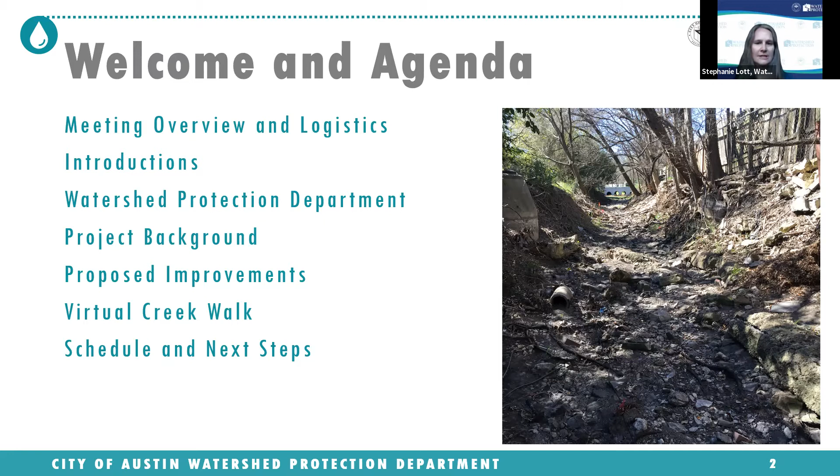We have Clayton West here. He is an engineer with the Watershed Protection Department, and he's going to give the background information. We also have Javi Gonzalez. He is with the Public Works Department, and he is managing the project for us. Our consulting engineers on this project are Freese and Nichols, and Jay Scanlon and George Fowler are the engineers working on it, and they are going to walk you through the problems and the solutions. So with that, I'm going to turn it over to you, Clayton.

Thanks, Stephanie. Hi everyone, hope you're having a good evening. As Stephanie introduced me, I'm Clayton West, an engineer with the Watershed Protection Department. I've worked in this group for about 7 years. Within the department, our group primarily focuses on repairing and restoring streams that have been damaged by erosion.

I want to give a quick background on our overall department, because a lot of times folks aren't too familiar with it, and maybe confuse it with the Austin Water Department. We are the Watershed Protection Department, and our mission is to protect the lives, the property, and the environment of Austin, primarily by reducing the impacts of major flooding, erosion in the streams and rivers through Austin, and water quality pollution in the streams and rivers of Austin.

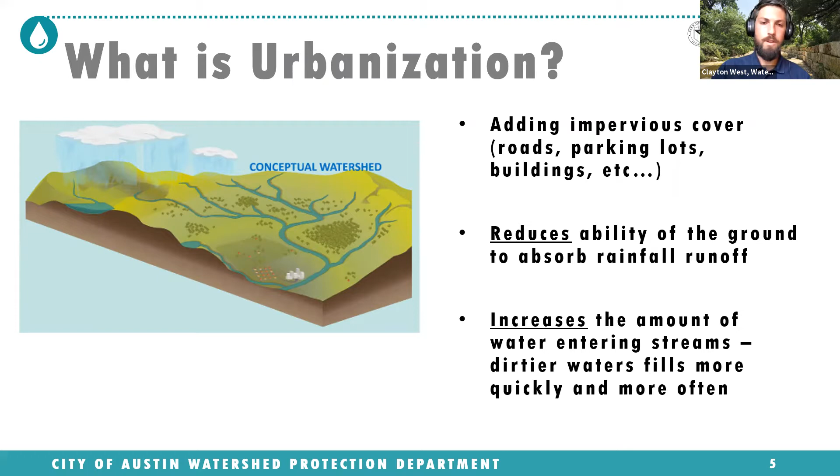I have a little cartoon that illustrates this. It's a bit simplistic, but hopefully it gets the message across. On the left-hand side, you can see a cartoon of what would be a rural landscape, with some nice green meadows and a stream, in a cross section view. When it rains, about half of that is going to be infiltrated, meaning it's absorbed into the ground, and maybe becomes groundwater, maybe percolating out into a stream further down.

40% is going to end up falling on the ground then evaporating back into the air, and only 10% is going to run off, flowing over the land into a stream or river. Now contrast that to the right-hand side cartoon, which shows an urban environment, more like where there's been that development I was just talking about. In this case, you get less rainfall infiltrating, only about 32%. You get less rainfall evaporating, and a lot more becomes runoff. Basically, the ground is less absorbent and more runs off. So between these two, I think it's obvious that Austin is more of an urban environment.

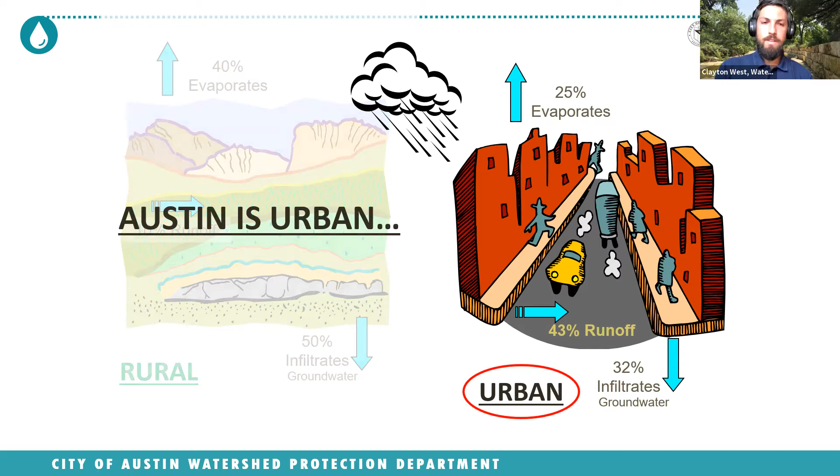And I think we're all familiar with this because when it rains a lot in Central Texas, we know that it floods. This is a picture of House Park on Lamar, if you're familiar with that area of town. In 2015 or 2016, I forget which year exactly, we had those big rains, and Shoal Creek, which runs right along Lamar, flooded.

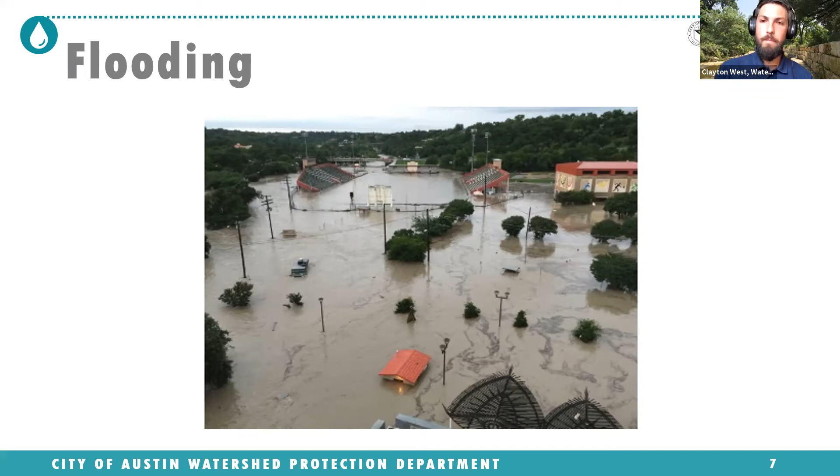This flooding probably would have occurred to some extent had there not been development. But the fact that the Shoal Creek watershed, the whole area of land that drains to Shoal Creek, is quite developed, being one of the older parts of Austin, means this flooding was surely made a lot worse by that development. The erosion, that faster moving water, enters the channel more quickly and has more energy, so it can wash away and transport more of the material around that channel.

So these two photos actually are from the channel that we're talking about tonight. We call it Williamson Creek Tributary 4, which means it's a tributary of a smaller stream that drains eventually to the larger stream, Williamson Creek. But I've kind of nicknamed it Turtle Creek because that sounds nicer, and the road runs through there in y'all's neighborhood, Turtle Creek. So these are photos of Turtle Creek.

Can I ask a quick question? Sure. Was part of the reason y'all are doing this because of the big apartment complex that's being built at South First and Turtle Creek? No, because that thing's a monster, and there used to be a lot of ground cover. There's a big field and stuff there, and now that's gone. So I was just wondering if this was kind of why y'all decided to take care of this problem now, or before it got bad.

That's a good question. Actually, there's not a lot of relation to that apartment complex going in. This stream, as a department, our group has been monitoring it for a number of years. And the way we decide to prioritize our projects is based on how severe the erosion is, et cetera. This creek has been on our short list for a while, and that development is new, and I'm sure they're complying with all the appropriate regulations.

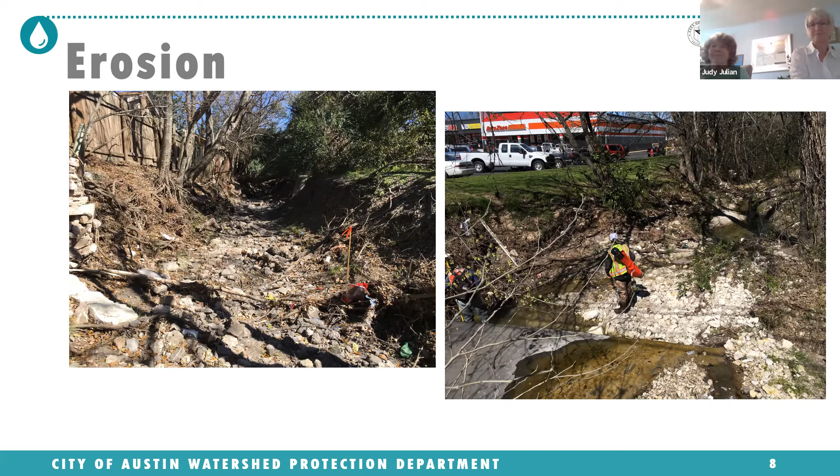Thanks, Judy. All right, just the last slide I have, giving an example of the problems our department's mission is to address: water pollution. Water pollution decreases the quality of the water in our streams. It degrades habitat for wildlife, fish, bugs, and other things that naturally want to be in the riparian or stream corridor. In Austin, we have a unique environment where we have some endangered species like the Barton Springs salamander, which could be harmed by poor water quality entering into Barton Springs. And water quality, even our drinking water supplies, can now be affected by poor water quality coming through our streams.

You can think back to October 2018, when we had those big floods in the hill country and all the sediment came through, and there was a boil water notice. That was because of a water quality issue in the Colorado River. Anyways, I just want to give a background of what our department's mission is and how it might relate to what we're trying to do in this location.

I described flooding, erosion, and water quality as being our three kind of thrusts of what we're trying to do. This project is really focused primarily on addressing an erosion issue. The stream that flows behind folks' properties, between commercial properties and residential properties, has been eroding severely. That's the primary driver for this project: to address the erosion, stabilize the creek, and repair and restore it. There are ancillary benefits to reducing the water quality impact, because there will be less sediment leaving the channel and flowing downstream.

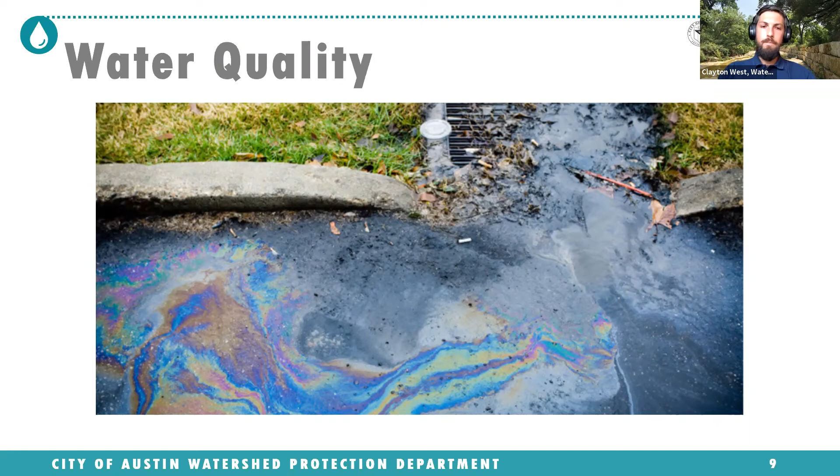So I was kind of getting into that just now, but I really want to touch on the issues that this project is looking to address, and then how we're going to do it. Like I said, the creek bottom and banks are eroding in this current channel, the Williamson Creek Tributary 4, aka Turtle Creek.

I'll pass it on now to, will it be Jay or George taking it on now? This will be George, and that's why I am jumping slides on you.

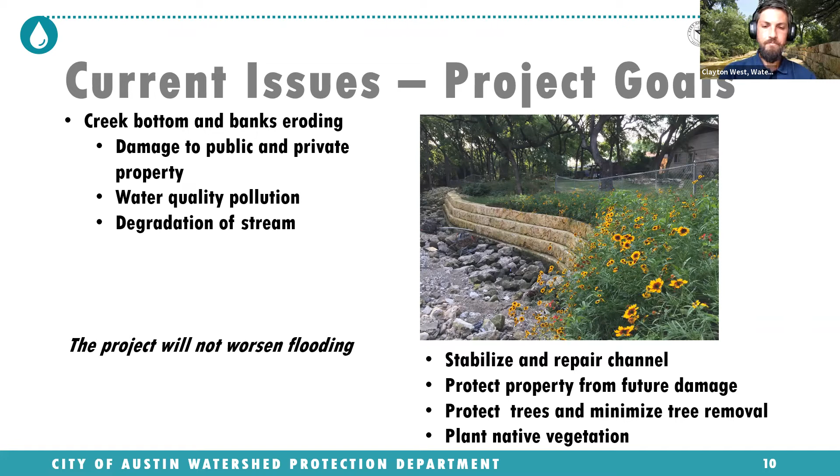Okay, real quick, if you can go back one slide, I just wanted to point out that photo you see on the screen, that is actually a project our department has completed in the past few years. We put that in there to give a visual reference on what this project might look like. We have some more conceptual graphics later on, in case folks are wondering. Sorry, George, take it away. No problem. Thank you, Clayton.

Okay, so I was going to talk a little bit about the project and the background in more detail, and then, as Clayton mentioned, we'll do a virtual walkthrough of the stream. You guys may not have been down in there and looked at it in detail. So we'll walk down the creek and show you what we're seeing and why the city's focused here.

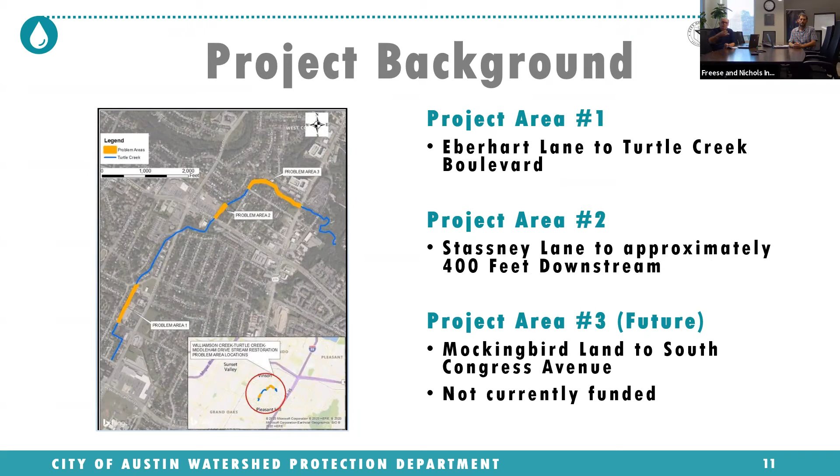That's segment 3. Currently, the city has funding to address problem areas 1 and 2, and they're going to combine that into one project. Project area 3 is not currently funded, but will likely be a future project at some point. Last year, we worked with the city and developed a preliminary engineering report.

As Clayton mentioned, we'll show you some of the conceptual designs that we have. A big part of looking at the stream last year was not only coming up with the designs, but understanding why the creek was eroding, what the potential and future risks were, so that we could develop a solution that is long-term. The city doesn't want to just put a Band-Aid on there.

The designs that we'll show you are engineered channels, but the city has a real heavy focus on preserving and enhancing the stream corridors, their assets, and they want to take advantage of those. And that'll be reflected in what you see.

We're just starting to get into the final design, which is why we wanted to reach out and let you guys know we're coming. As we get into that, those conceptual designs will be revised a little bit, and we'll talk about that.

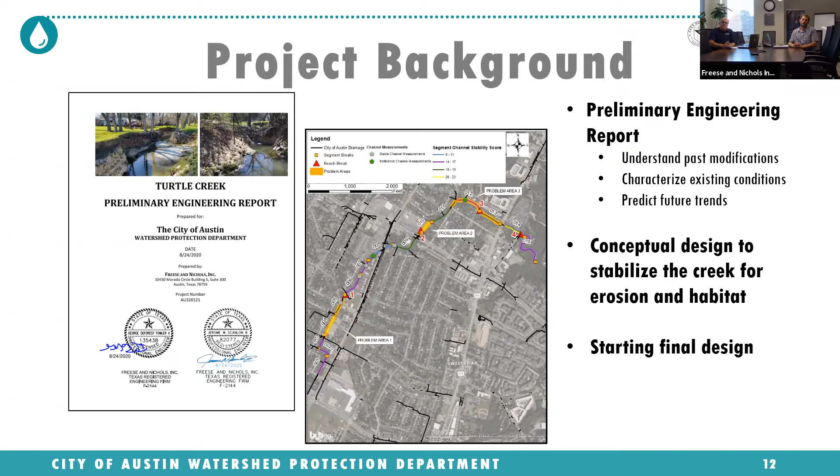What we'll aim to do is minimize impacts to existing trees and properties, things like that, take advantage of the easements and right-of-way the city has, and develop a channel section that, as Clayton mentioned, won't have any adverse impacts on flooding. It may not have big impacts, but it'll certainly have improved water quality and long-term stability of the stream.

The city has developed several conceptual, sort of artist versions of the types of work they do. As you can see, this is not a concrete lined ditch that we would have seen built 40, 50 years ago. To the extent they can, they like to use natural materials on the bottom of the channel, vegetated slopes on the side, and use that to not only create a stable channel, but also provide additional benefits like groundwater absorption and development of vegetative corridors that help wildlife and water quality.

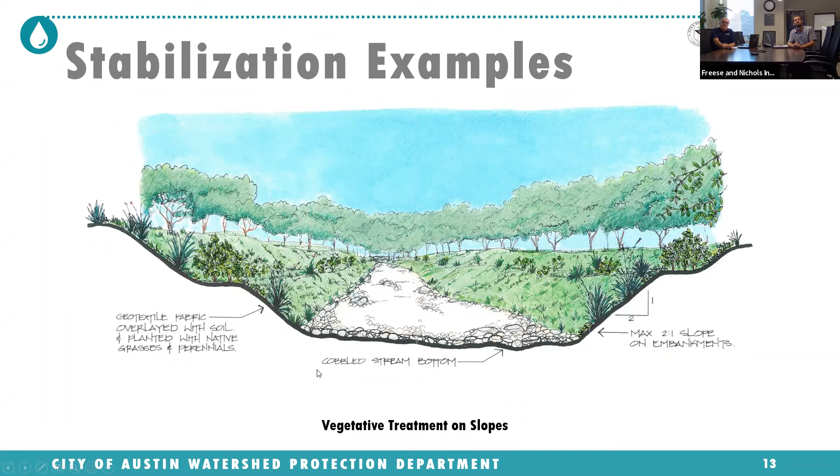In this version, it's primarily earthen side slopes with a cobble bottom. A version of that they also do is combining the vegetative slopes with limestone block walls. You can see in Clayton's screenshot there, he's got an example of one of their projects in the background, and you can see the limestone block wall behind him. So we'll use that in areas where we have a need for a steep slope, but still want to use native materials.

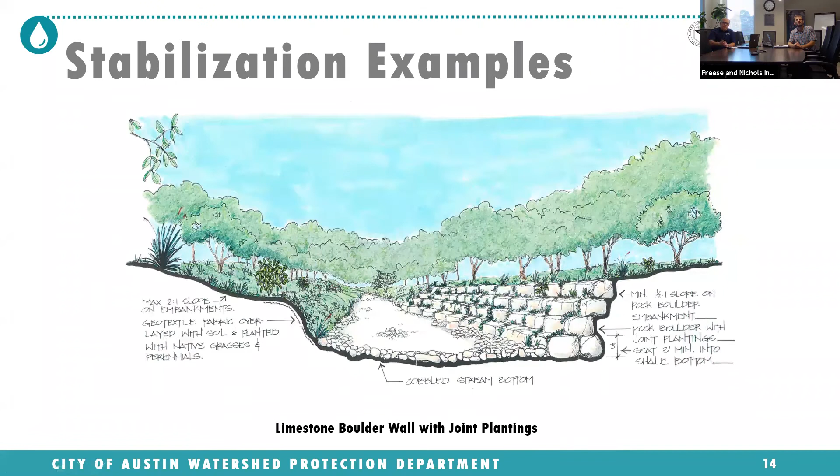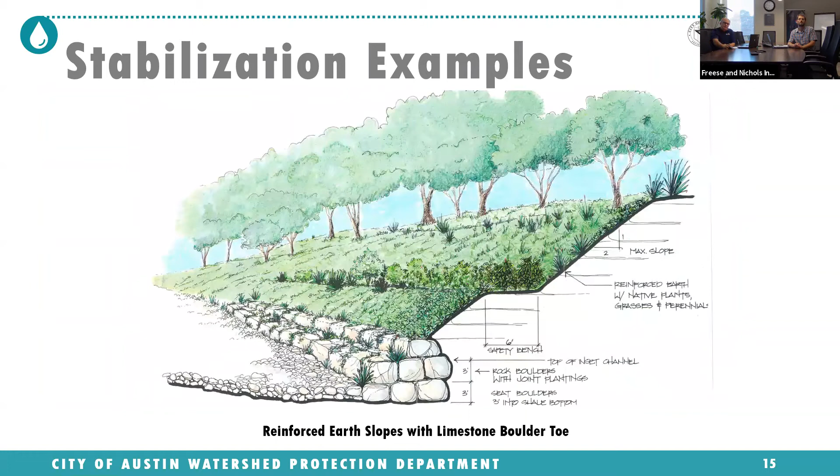And the third version is a combination of those two, where we might use limestone blocks or rock at the toe of the slope, and then use engineered and vegetated slopes to provide the stability.

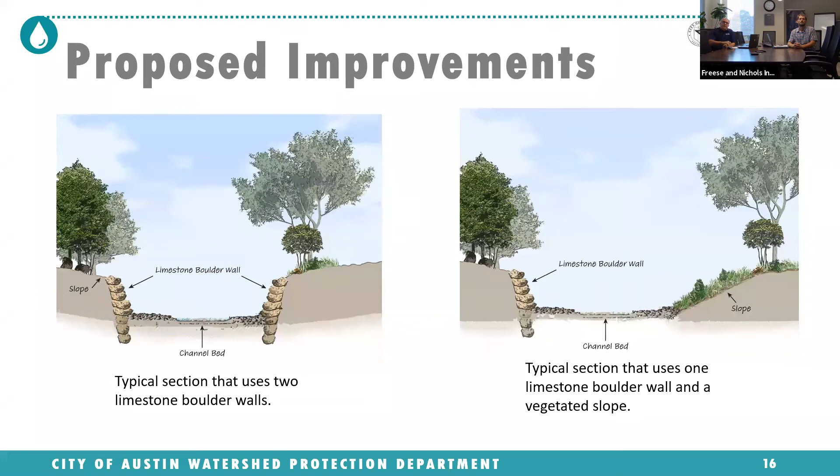When we do that, we'll preserve what we can above the wall and then look for opportunities to enhance that with native vegetation, grasses, shrubs, trees. On the right side, you see that combination similar to the artist renditions where we have the limestone boulder wall on one side, and on the other side, we'll use laid back slopes and vegetation to provide the stability.

And with that, I'm going to turn it over to George. He's going to go ahead and do a quick virtual creek walk for you through these corridors.

Thanks, Jay. One of the reasons why we wanted to do a virtual creek walk tonight was because not everyone has the opportunity to walk down the creek or to look over your back fence and understand what's going on at your neighbor's side of the creek a couple houses down. So we wanted to take this opportunity to walk everyone through our project sites so you can look at what the existing conditions are within the creek.

As we're walking through it, please remember some of the goals the Watershed Protection Department has, which is controlling erosion that may threaten private or public infrastructure, water quality pollution protection, stopping sediment from going into the streams, and also some of the flooding issues and how to prevent flooding, and complying with the city's flood damage prevention ordinances.

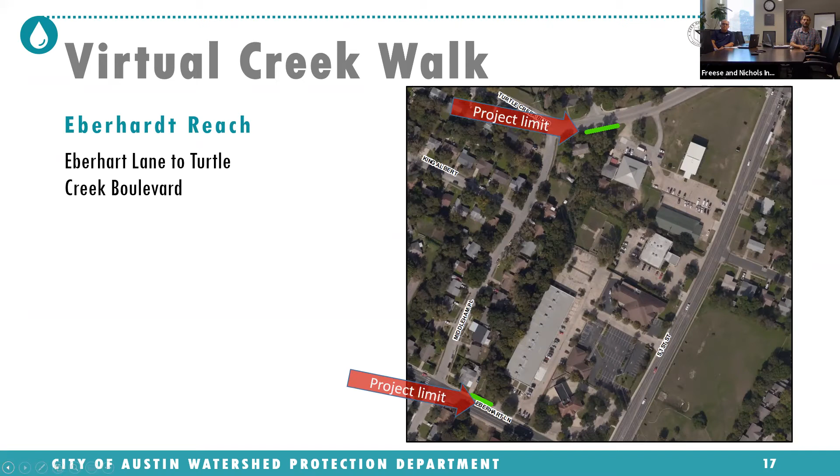So here we are going to start off at Eberhart Lane, where on this photo is an aerial photo, and on the upper part is Turtle Creek Boulevard. On the southern part of the photo is Eberhart Lane. We're going to start at Eberhart Lane and walk our way downstream.

So at Eberhart Lane, we're looking downstream. Here on your left bank, which is where you see the stacked rock wall, that wall has failed, and private land is starting to fail and fall into the creek. Those are examples of where a stream has received too much urbanized rainfall runoff and is moving very quickly when it goes through.

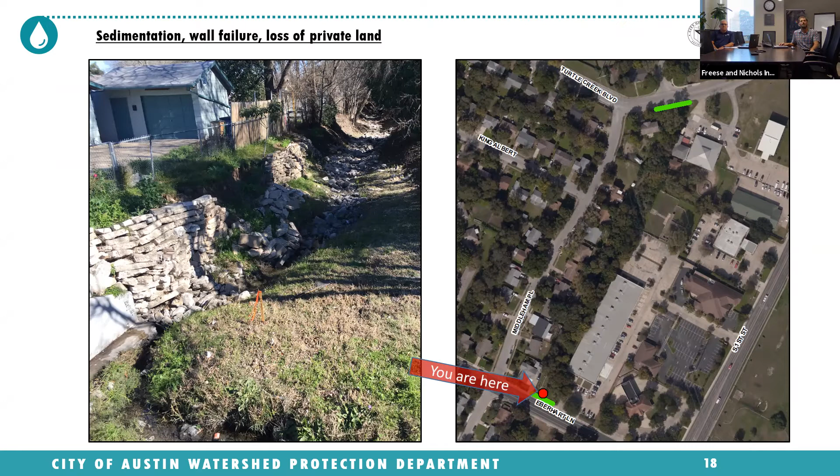It erodes the stream bottom and the stream bank, undermining people's retaining walls that protect their homes and native stream banks. As we move further downstream, you can start to see as we get away from that retaining wall, what is left of the native stream banks, where they are steep, where if I were to walk on those, there's a high chance - even though I'm naturally clumsy - this is going to be a guaranteed fall risk for me falling off a stream bank like this.

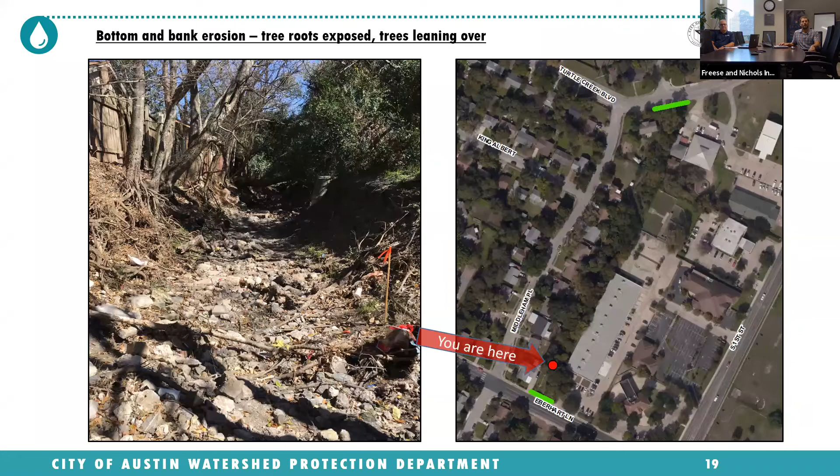What happens is when the erosion occurs on the stream bank, it'll remove the material along the stream bank, exposing tree roots. That process continues over time, and as you'll start to see, those trees will start to lean and then eventually fall over, spanning the channel, which we'll talk to in a moment.

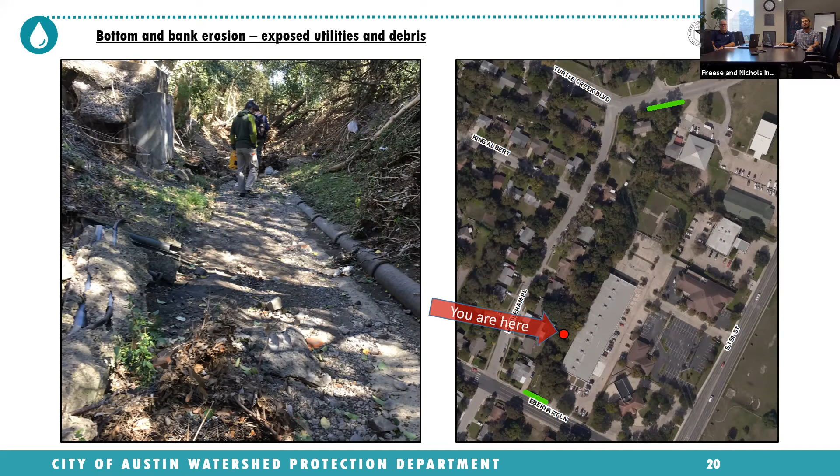Where the gentleman is in the green jacket to his left is an example of that infrastructure that's been damaged by erosion. The pipe on the right we believe is an abandoned sewer line. But again, when they installed those sewer lines several decades ago, that would have been under a couple feet of cover that has been eroded away through the process of urbanization. As we move even further down the stream, you can see the stream has narrowed considerably.

The bottom of the stream is now down to a couple feet where it was at least 6 to 7 feet wide above. This photo is taken looking upstream. If you squint really hard, you can see the culverts at Eberhart Lane way up in the distance.

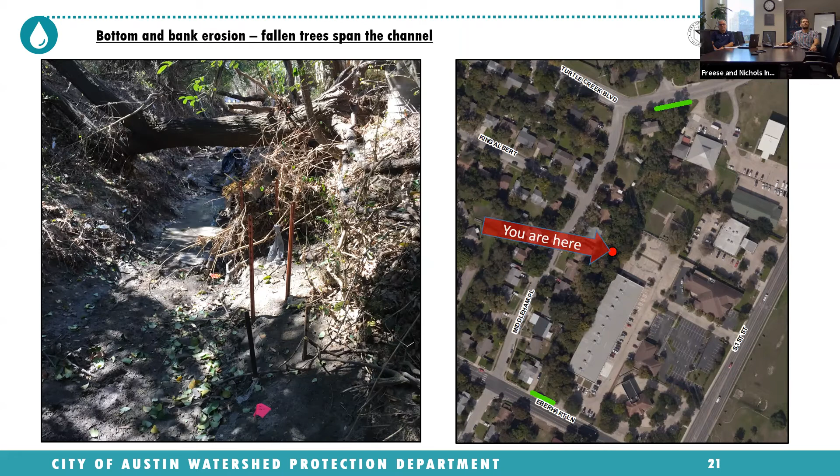Three trees have fallen over and now span the channel, which could trap debris and temporarily plug it. These are the kind of problems the Watershed Protection Department prioritizes: stream stabilization, reducing flood hazards, and improving habitat. If you imagine yourself as a salamander or a fish, when a big flood comes through, you have no place to run and no place to hide. You're going to get flushed out to the Colorado. So those are the things we look to achieve with these stabilization techniques.

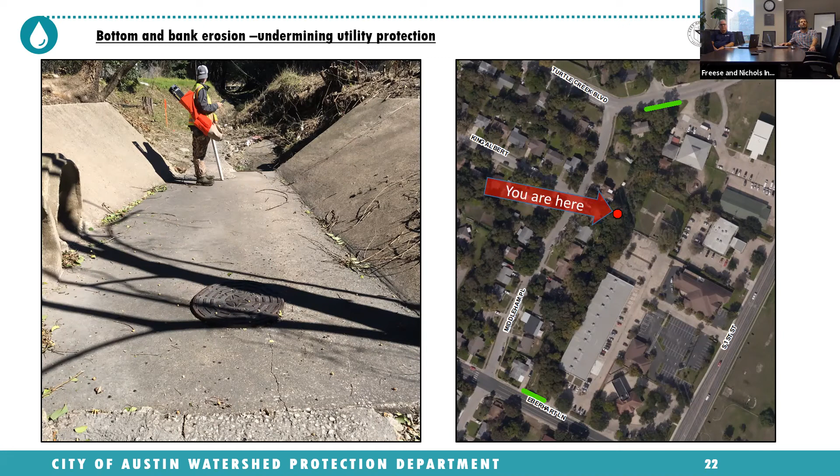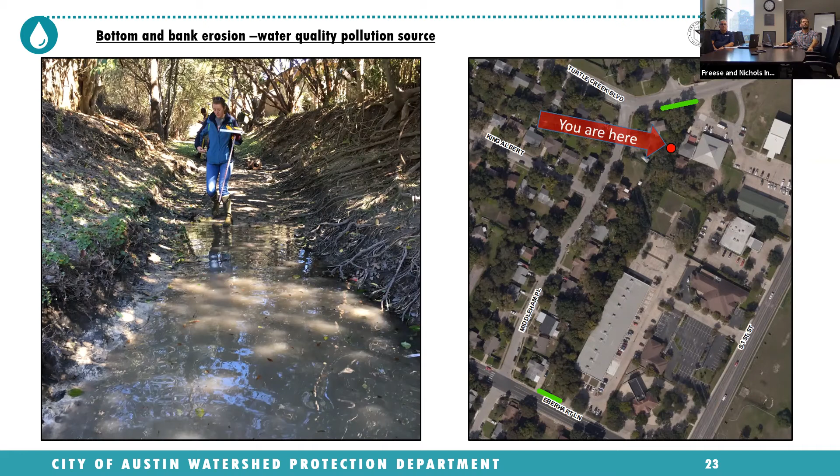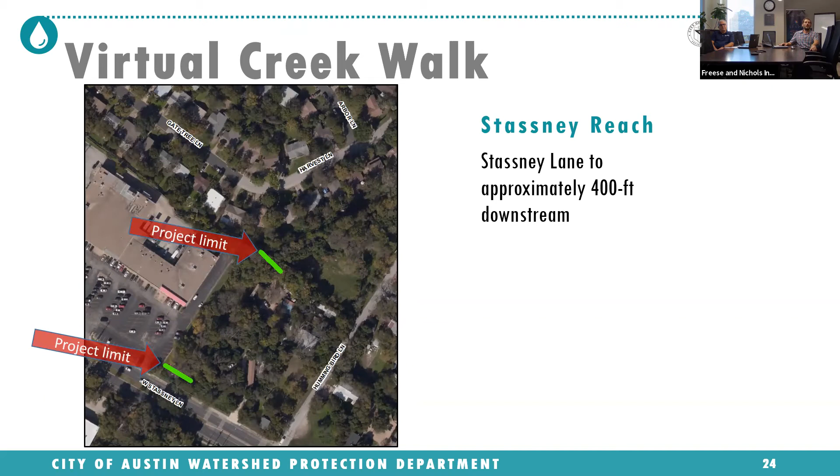Now we're going to switch down to Stassney, and I advise you to buckle your seatbelts, because the ride is going to get a little bumpy here — we have an even more drastic change in our stream corridor. On the left is the AutoZone, which you can see in this photo.

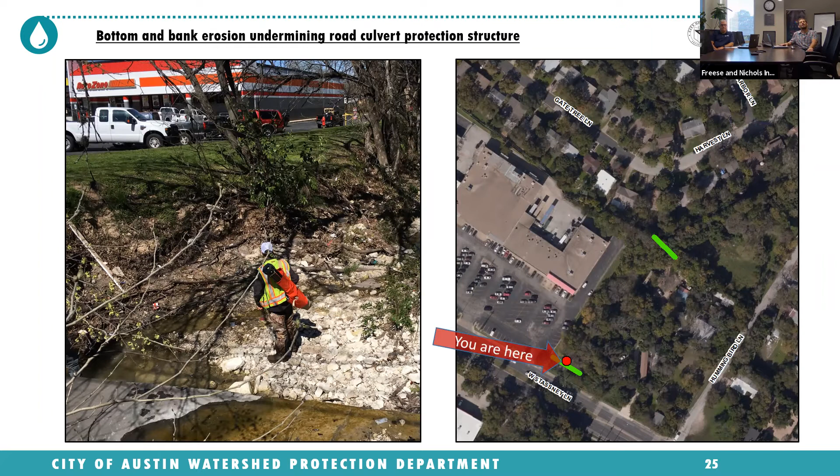Pay attention to the distance between the gentleman's hat and the top of bank — probably a couple feet vertically. As we move downstream, you can see what happens in an urbanized watershed: the channel bottom has dropped dramatically. Now instead of a couple feet from the gentleman's hat, we're looking at probably 10 to 11 feet of material removed from the stream bed.

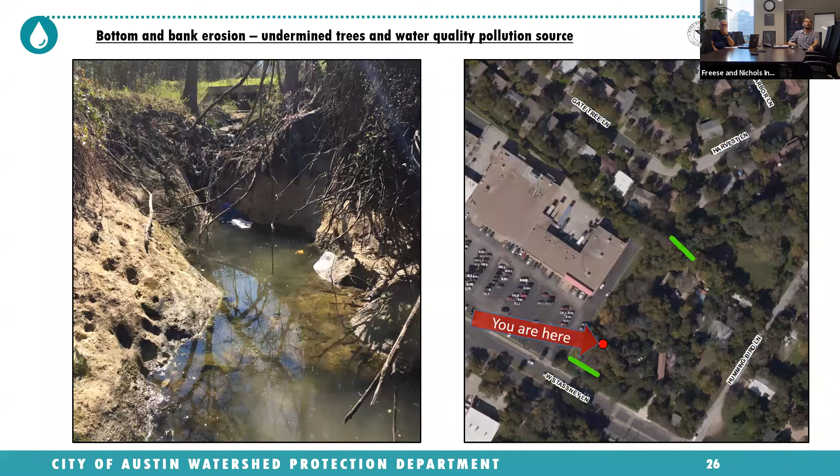All of those exposed stream banks will be a source of water quality pollution and loss of habitat where no critters can hide during higher water events. That dramatic lowering of the channel bed has undermined trees, which are now prone to falling in, creating oversteepened banks near cliffs with a lot of instability, which are sources of water quality pollution.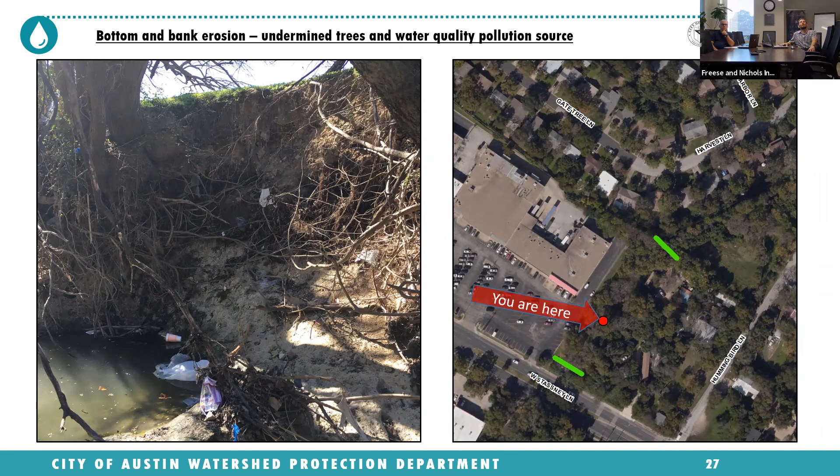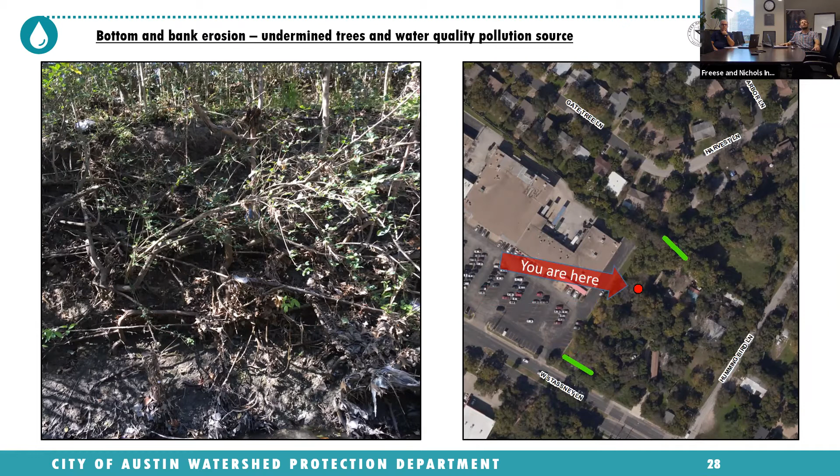Again, another exposed area down through this reach, which is a pretty consistent indicator of instability, erosion, and water quality pollution problems.

With that, I'd like to turn it back over to Clayton to take us through the end of the presentation. Great, thank you George for giving us that creek tour.

That was a great overview of what the problem looks like. We expected there probably hadn't been a lot of folks who had walked down that creek, maybe a couple of curious folks who live in the area. I want to take this opportunity now to talk about moving forward, our budget, and a schedule.

By springtime, we hope to have a finalized plan. Then hopefully by summertime, maybe fall, depending on how everything goes next year, we'll be breaking ground for construction. We're also planning to have another opportunity to meet with the neighborhood, probably once we've selected the contractor, before going to construction, to give everyone a really good idea of what that's going to look like. But for right now, this is where we're at.

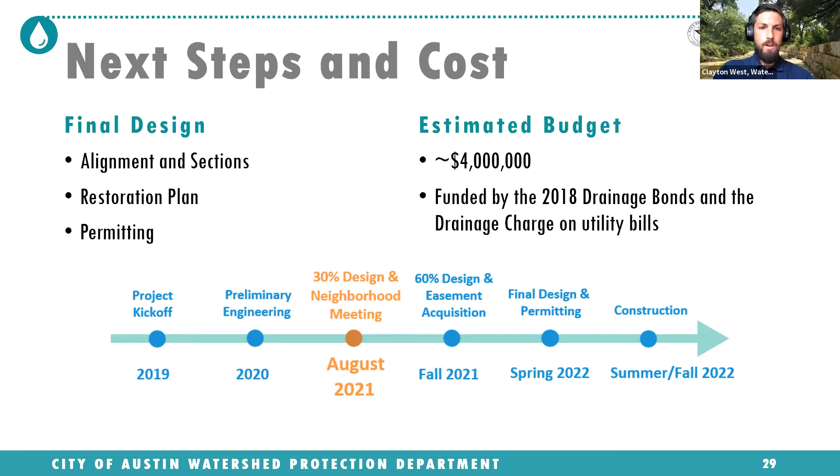So with that, I think it's time, if anyone has any questions, I'd definitely be available to help answer any questions y'all may have.